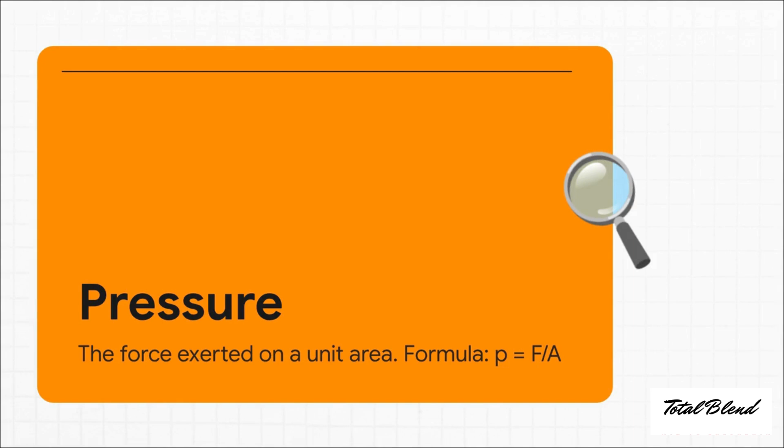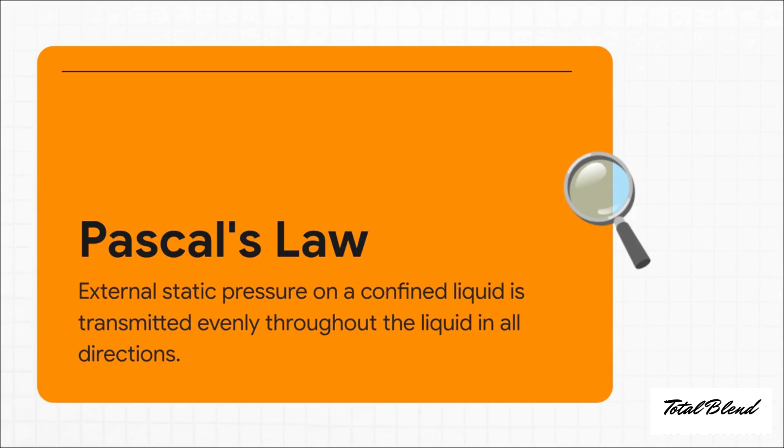Now, this is where it gets really, really cool. Imagine squeezing a water balloon. The pressure you're putting on it with your fingers, it doesn't just stay there, right? The whole balloon bulges out everywhere at once. That's Pascal's law. And that exact same principle is how a mechanic can lift a 2-ton car just by pushing on a little pedal. It's an incredible force multiplier.

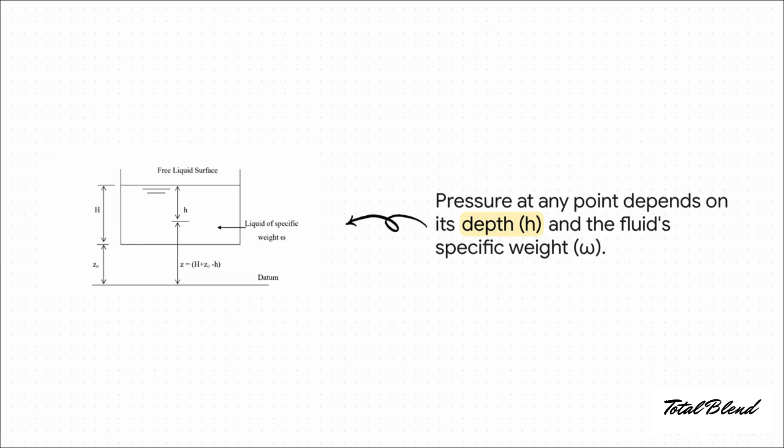But here's the thing. You don't need a fancy hydraulic lift to experience pressure. We're actually swimming in it right now. We live at the bottom of a giant ocean of air, and it's pushing down on us from every single direction. And this diagram shows it perfectly. See, the deeper you go, the more fluid, the more stuff is sitting on top of you pushing down. It's the exact reason your ears feel like they're going to pop when you dive to the bottom of a deep swimming pool. That's the sheer weight of all that water pressing in on you.

And that brings us to atmospheric pressure. That huge ocean of air I mentioned, it is surprisingly heavy. Down here at sea level, it's pushing on you with about 14.7 pounds on every single square inch. That is like balancing a bowling ball on every square inch of your body. So why don't we get flattened like a pancake? Well, because the pressure inside our bodies is pushing out with the exact same force. We're in perfect balance.

So if we're living under this constant blanket of 14.7 psi all the time, how do we measure any other pressure? How do we make sense of it all? Well, this is where it gets really interesting. It turns out we need a few different ways to look at pressure, and it all comes down to choosing your starting point, your zero.

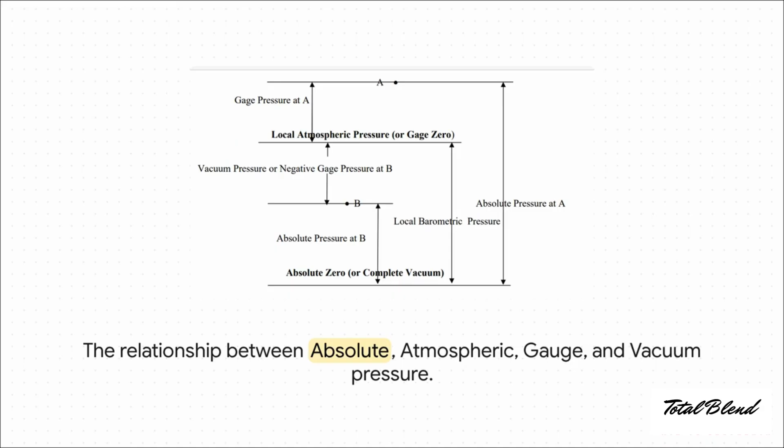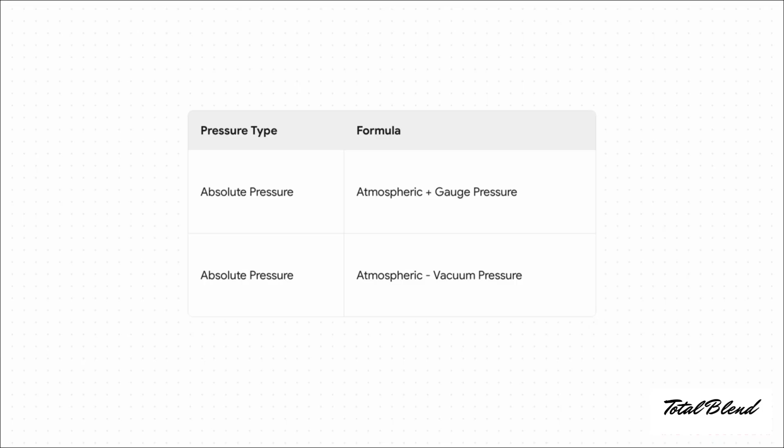And here's how it all fits together in a couple of simple formulas. The absolute pressure, that's the total true pressure, is just the gauge pressure you measure plus that atmospheric pressure that's always there. It's the whole shebang. And if you're measuring a vacuum, you're just looking at how much pressure you've taken away from the atmospheric pressure. Simple as that.

And, drum roll please, we're back to our tire. That 35 psi on your gauge, that is gauge pressure. It's not the total pressure inside the tire. It's telling you that there's 35 psi more pressure inside that tire than there is in the air outside of it. So the absolute total pressure is actually that 35 psi plus the 14.7 psi of the atmosphere. You're looking at nearly 50 psi in total. Kind of blows your mind, right?

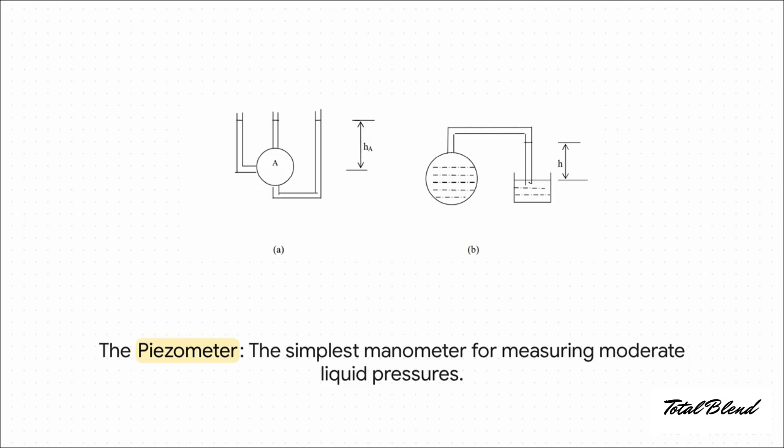Okay, so we've got the theory down. That's great. But how do we actually see this invisible force? How do we measure it? Well, let's take a quick look at some of the really clever ways engineers have figured out how to do just that. First up, we have the piezometer. This is about as basic as it gets. It's just a tube. The pressure inside the pipe pushes the liquid up the tube. The higher the liquid goes, the higher the pressure. It's simple, it's elegant, and it works great for liquids. But it's not so useful for gases.

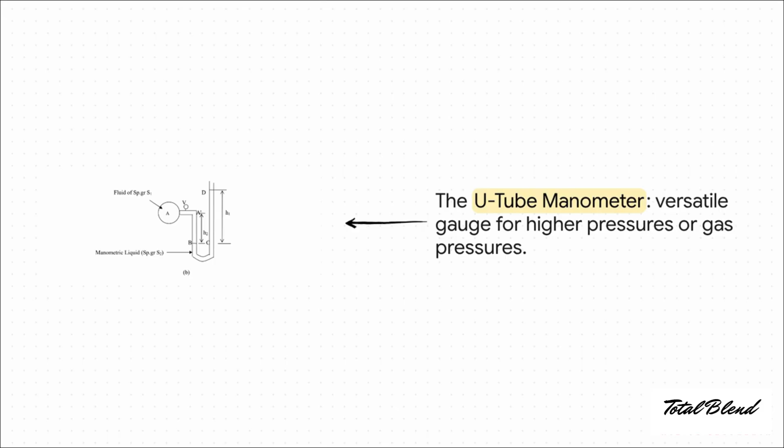Now, the U-tube manometer. This is a serious upgrade. By using a really dense liquid, like mercury, we can measure much, much higher pressures without needing a tube that's as tall as a building. The pressure just pushes down on one side of the U, and you measure the height difference. It's a classic design for a very good reason. But let's be real. You're not going to find a glass U-tube full of mercury on your dashboard or on your bike pump. For most of the stuff we use every day, we need something a lot more compact and a whole lot more clever.

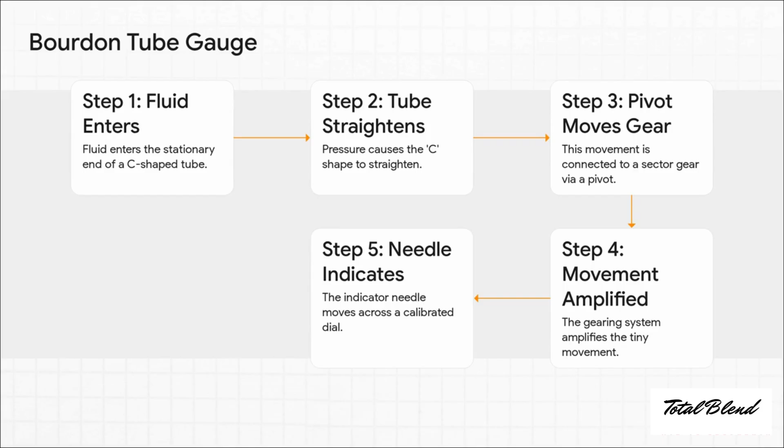Meet the Bourdon tube gauge, and honestly, this thing is a mechanical work of art. The pressure goes into this little curved, C-shaped tube, and it tries to straighten the tube out. Then, a whole system of tiny, precise gears takes that microscopic movement and magnifies it, turning it into the big, sweeping motion of the needle on the dial. It's like a finely crafted watch, but for pressure. It is so cool.

And now that you know what to look for, I guarantee you're going to start seeing these things absolutely everywhere. They are the silent workhorses of our modern world, doing everything from keeping hospital oxygen tanks safe to making sure our power plants are running just right. They're a true unsung hero of engineering.

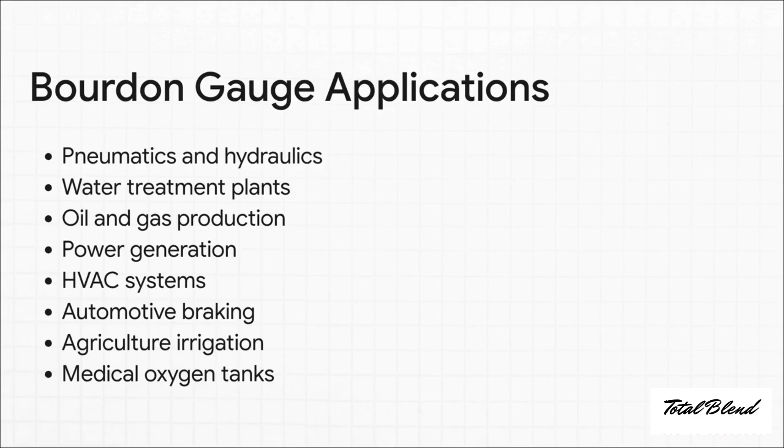So the next time you see a pressure gauge, you'll know the whole story. You'll know it's not just a number. It's a relationship. And it kind of makes you wonder, doesn't it? What other numbers that we treat as absolute in our daily lives are really just a matter of perspective? Something to chew on. Thanks for joining me for this one.